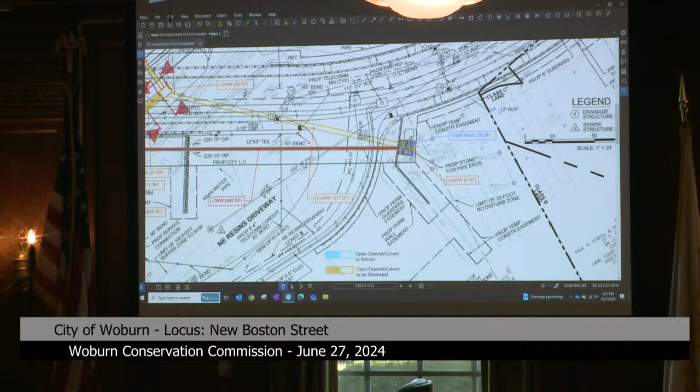In addition, we have some culvert work, the red connection across to the outfall across New Boston Street. We have a small amount of work at the outfall that will result in conversion of bordering vegetated wetland to land underwater - a small impact area of 29 square feet, with replication proposed at a ratio of 3 to 1 immediately adjacent. This culvert replacement will also result in a small section of daylighting, about 36 square feet, and an increase in land underwater by about 842 square feet in the area.

In general, erosion and sedimentation controls are proposed around the site, at the limits of work, just to prevent any incidental discharges to resource areas during construction.

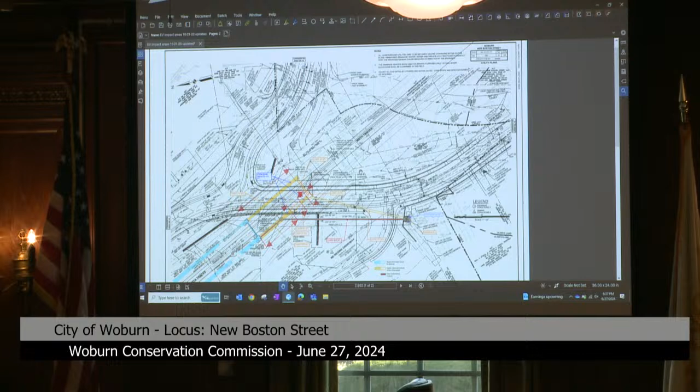Of note, there was a large drainage effort on this job that went back and forth during permitting with some nearby abutters, which got peer reviewed and accepted as part of the original NOI for 2 detention basins being installed. One is just off screen along what we're calling the 315 New Boston Street driveway, and one is off screen to the left along the northern section of New Boston Street driveway. That information was all included in the original filing and the refiling we submitted.

Any questions from the commission? So you said the Eversource work is the only change that's happened so far? Yep. And none are anticipated? No more changes at this time. So the plans are reflecting the intentional work, right? Yep, correct.

Previously you had requested that we waive the 25-foot no disturb zone because there was a need to work there. So I would move tonight that we waive the 25-foot no disturb zone for the project where it was previously requested. Second. All in favor? Aye. Any opposed? Any abstentions? So that's granted.

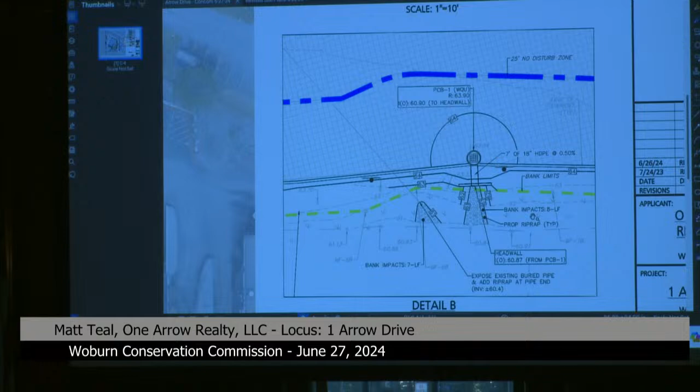Jerry, I think you were out recently to take a look at that again. Yesterday. So that's what we're also looking to repair. Part of the reason that delayed our submission till today was the fact that we needed to go out and do some additional surveying. That existing pipe is actually quite low.

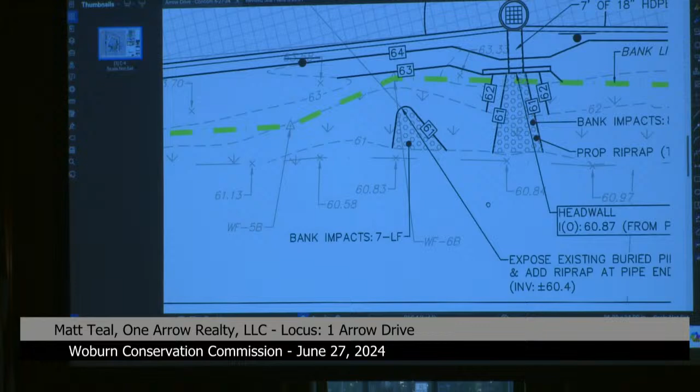That's part of the question we had at the last informal meeting, what work you want us to do in the stream as far as cleaning out, but there seems to be a lot of sediment in the stream at that location where that pipe enters. We're trying to address that on the set of drawings here.

So the water quality unit wasn't included in the last set of drawings, right? Correct, correct. Okay, thank you. Yep, so Mira can go through some of the details here and answer any other questions.

Hi, for the record, I'm Mira Cousins with Civil Design Consultants. As we mentioned before, we just submitted the revised plans and reports today, so we understand you haven't had time to review everything, and we'll need to continue this meeting, but we thought it'd be helpful to walk through the changes to the plans we're proposing.

So with that, just a refresher, the site is One Arrow Drive. It's located in the Industrial Park District. The total area of the lot is approximately 3.47 acres. The site contains a 28,000 square foot building and is surrounded by pavement area.

For resource areas, an intermittent stream, which is essentially a man-made drainage ditch, is located at the southern boundary, this green line here. The local 25-foot no disturb zone, the 100-foot buffer zone, and the local 150-foot buffer zone extend from the bank of the stream in a northerly direction. The majority of the areas within the buffer zones are either disturbed or degraded with impervious area, as you can see.

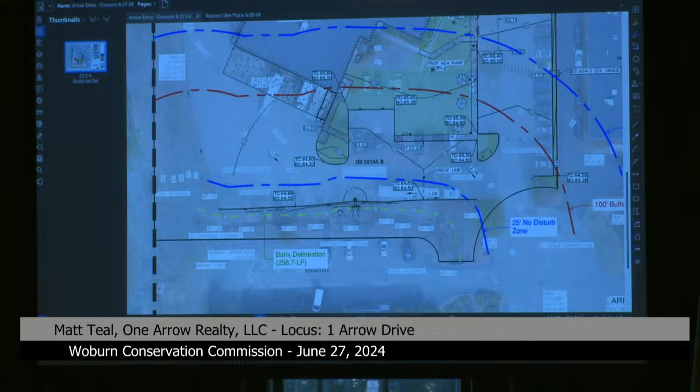Since there's only a narrow 5 to 8 foot buffer strip from the bank to the edge of pavement, we were limited to where we can place that outfall associated with the water quality structure. Right here.

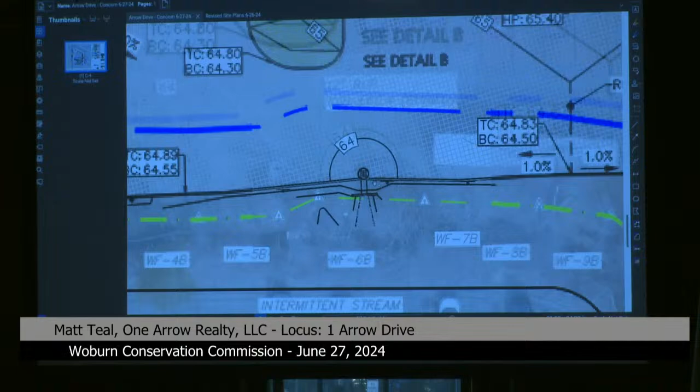So we are proposing the new outfall to be located a foot from the bank on the upland side, but minor work will be required within the bank for minor regrading around the outfall and installation of riprap. The outfall will contain a concrete headwall and stone armoring to properly control stormwater discharge and mitigate any erosive forces. And then going back to the existing outfall, right over here, zoom into the other.

See it better here. We're proposing to expose the pipe so it's no longer buried and adding riprap at that pipe end. We would be impacting 8 feet of bank for the new outfall and 7 linear feet for the maintenance of the existing outfall, and that would be a total of 80 square feet of total impact area within the bank.

We're also proposing to remove any trash, debris, obstructions, and accumulated sediment within the bank to restore flow capacities. So in summary, the redevelopment of the site will be located in existing, developed, and disturbed areas. A total net reduction of 2,988 square feet of impervious area is proposed within the 150-foot buffer zone.

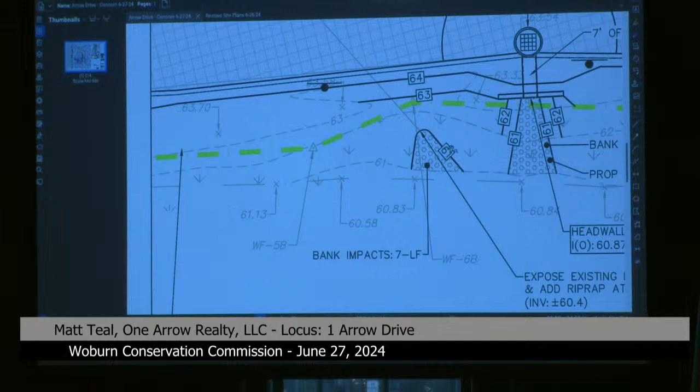We're reducing both runoff peak flows and volume to the stream by approximately 8%. And the project would result in a significant improvement to the treatment of the stormwater from the majority of the pavement area, which currently sheet flows into the bank resource area without any treatment. So with that, happy to take any questions.

Mr. Chairman, I've got just a quick question. On the pipe, the outlet that you found and uncovered, what type of condition did you find? Do you think there's any damage to the pipe going away? We didn't notice any damage to the pipe. It's a 12-inch reinforced concrete pipe. So what we saw visibly, what we could see, didn't look damaged.

It was just buried. So it was buried, you uncovered it? And I think we'll discover more once we're able to hand dig that area. If it requires any attention, I'm assuming you'll get to it? Yes, exactly. Yep. Thank you.

So I had a question on that. Are you proposing to remove all that sediment basically from the outlet to the bank or to the stream? There seems to be quite a bit there, like probably a couple yards at least or more of sediment that's been deposited over the years. Correct, that's going to be removed and replaced with riprap in that location.

Yeah, riprap at the end. So we're going to expose that pipe and add riprap to the bottom of that pipe. Okay, and then the water quality unit that's got a grate on the top of it? Correct, there's an inlet grate.

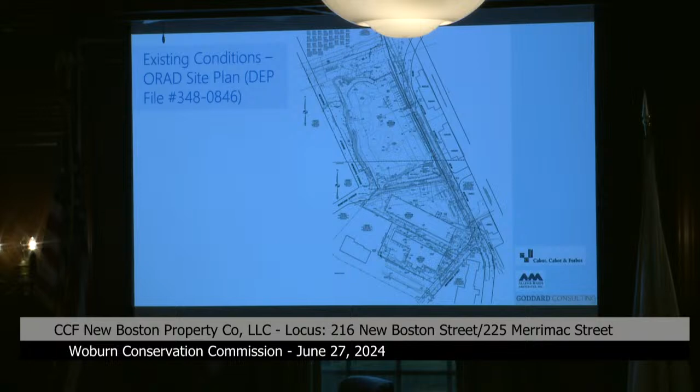And here's just an existing conditions map for us to take a look at if there's any questions on that. We'll be moving into the proposed pest control site plan, and Nick will take it from here.

Sure. So in addition to this pest control plan, we had also submitted revised site preparation plans, a revised grading and drainage plan, and a revised utility plan. The site prep plan was updated to remove some of the comments we had on there, and to remove the existing stockpiles and existing trailers, as requested by the commission. So we had taken those notes off.

The grading and drainage was updated in coordination with the latest utility plan that we discussed last week. We moved the sewer to the front of the site, and we're currently working with the DPW Director, Jay Duran, to finalize that design and get his approval before we go to construction. So those plans were submitted. If there are any specific questions on those plans, we do have them with us and can pull them up.

But what you have in front of you is the pest control plan. This shows rodent traps situated every 30 feet along the edge of the limit of work for the project.

The traps will be monitored every two weeks. After each visit, there'll be a report submitted that shows all the findings, the products being used, the amounts of products being used, the EPA registration numbers, and the technician's name and license number.

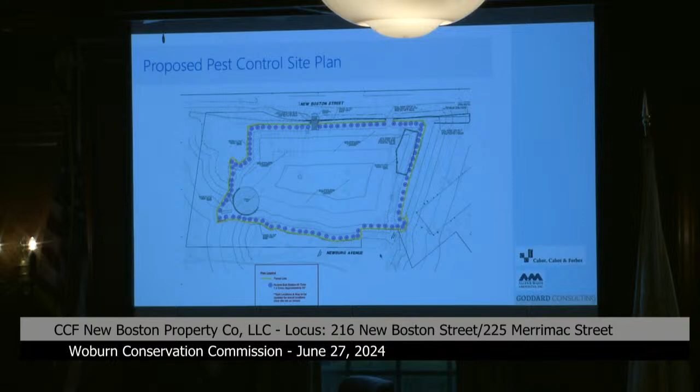Jim, I'll refer to you on traps. Yeah, so I really appreciate you putting the plan together. It's very detailed. It was good.

So there's a big difference between traps and rodenticides. When we talk about putting them into tamper-resistant bait stations, those bait stations can hold traps, so they can be electronic traps or snap traps. It's an option. There are a variety of different types of baits. Specifically, what I don't want to see is the use of anticoagulant rodenticides, second generation and first generation. That's what I would prefer not to see or not to have.

Other options would include vitamin D3, like I mentioned in the previous public hearing. That's one option, and there's a variety of different prevention methods and things you can do in burrows when you're doing your construction. There are many municipalities now that are using, not vitamin D3, but dry ice methods for burrows that will just take care of your rodents during construction.

So that's an option you can consider. Can you explain that a little bit more? I'm not a rodent control expert, but are you referring to dropping dry ice into burrows that they find around the site? So they have to locate those first before they use it, they don't just leave dry ice in a trap?